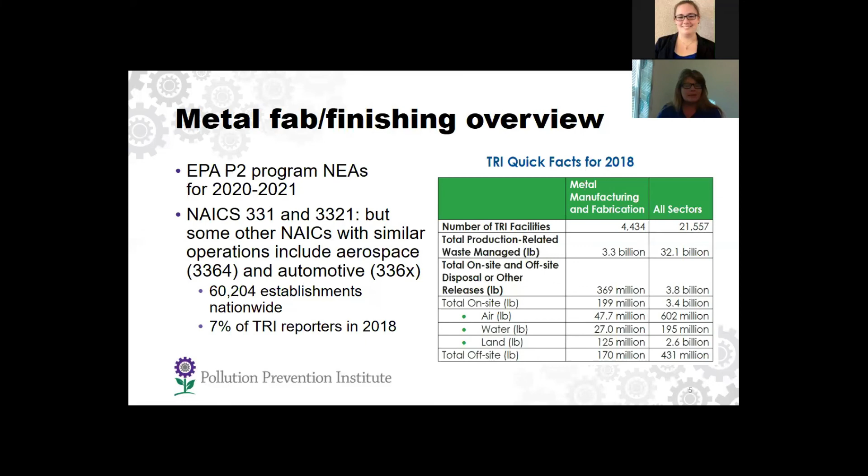There are approximately 4,434 industries that are reporting to TRI that are in the metal manufacturing and fabricating industry. And so you can see here they're managing 3.3 billion pounds of waste annually. And down here you can see the breakdown of on-site and off-site disposal or other releases into the environment. And today we're going to be concentrating on those. We're going to be talking about releases into the air, into the water, hazardous waste and other waste releases. And so that is what this workshop is going to be focusing on. Next slide, please.

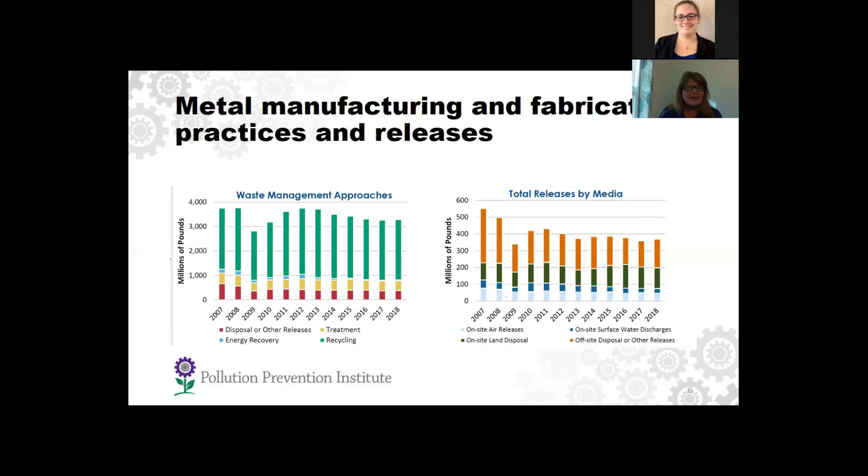Over here are total releases, and we can see that off-site disposal is a fairly large portion, and some of that really is in the recycling area. So again, it matches up with this information. And we have on-site air releases that are down here. These numbers, they're not that large, which is a good thing. On-site land disposal and on-site surface water discharges. Arthur and Lena are going to talk about the water end of things today, and we'll delve into that. It's really important. Next slide, please.

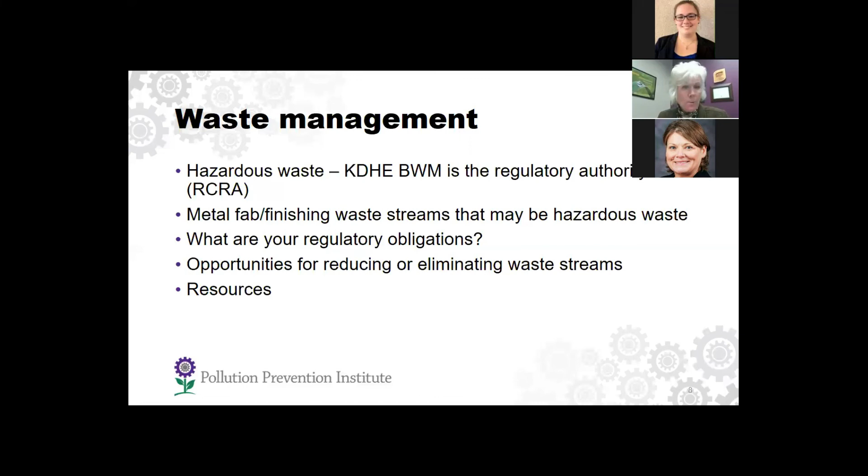And in fact, RCRA and hazardous waste is probably the strictest enforced regulation across the country. So that means if you're going to see an inspector, you're more than likely to see an inspector from KDHE Bureau of Waste Management. So we're also going to touch on what are your most problematic waste streams with regard to hazardous waste. What are your regulatory obligations? And then what are the opportunities for reducing or eliminating some waste streams? And then some resources. Next slide, please.

Okay, so we're going to start with these potential waste streams. As you can see, I have broken these up into 3 different processes: your metal preparation process, which of course is so important, your painting and coating process, and then your cleanup process, which is probably the area where you generate the most hazardous waste. You can read the slide there, blasting solvents. Sometimes some of these chemical waters, those are the wastes that you might generate in metal prep.

In painting and coating, it might be some gun cleaners, it might be spent paint solvent waste, or expired inventory, which is really a problem, right? Because you paid for that kit coming in, it sat on the shelf, you did not use it, and then you paid for it going out the door. So that's a low-hanging fruit that really needs to be addressed if you think that's a problem at your facility.

And then cleanup, all kinds of different solvents that you use, paints mixed with those solvents from the cleanup process. Although the water that you may use in your 3 or 5 stage washer, if you have one, is regulated by the Clean Water Act, sometimes you've got sludges that you've got to dig out of those washers, and those have to be analyzed for hazardous waste. Paint contaminated materials, right? Are your filters, your rags, your masking, your PPE hazardous waste? Well, the answer is sometimes, if you're using RCRA metals like chromium in your paints.

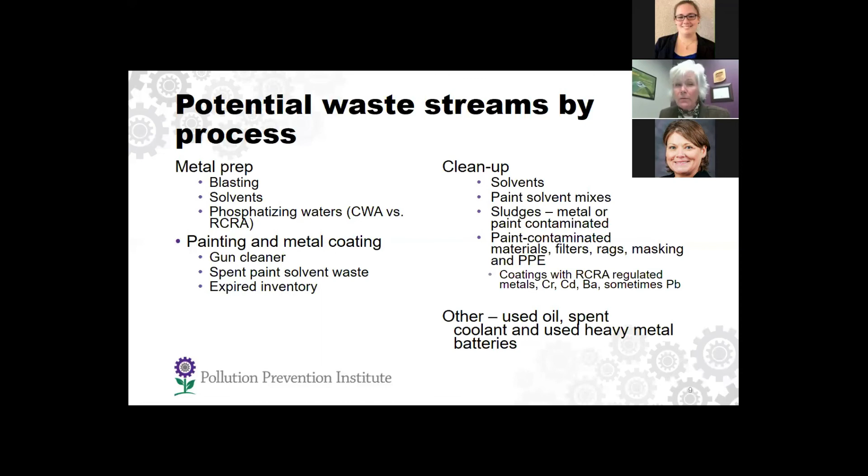When it comes to solvent waste, there's lots of ways to control that by, and we're going to talk about that, changing the material, technology, and process. Next slide, please.

Okay, your compliance obligations. So first of all, training is the place to start, you guys. So you all are hazardous waste generators. And so anyone handling hazardous waste has to be trained within 6 months of taking the position, and then has to have an annual refresher. So those are all the folks who are dumping waste into the drum. Those are the environmental managers like yourself who should know pretty much the full scope of the regulations and what is required. And those are people certainly signing the manifest.

Training is very, very important, and you have to document it in Kansas. They will ask you about your training records. We do have an online training curriculum. It costs $30. You can take it anytime, and it does give you a certificate of training. That needs to be complemented with some on-site training.

The next thing is determinations, hazardous waste determinations. Those can be really confusing for hazardous waste generators, and we will be happy to help you with that. But what you have to do is fill out one of these documents for each hazardous waste stream you have. And there are some waste streams at your facilities that you may think are hazardous, but are not. Or by doing some waste segregation and determining, you could actually take them out of the hazardous waste stream. And we are good at helping you with that, and we would be happy to help you do that if needed.

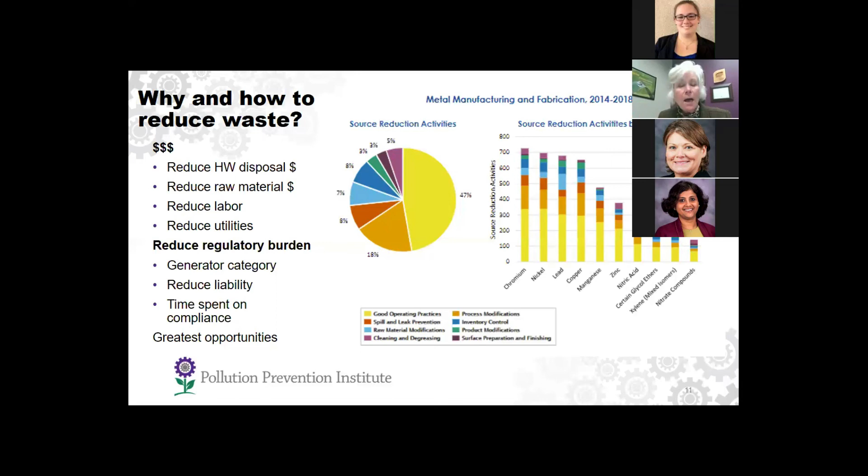And so if you look at the chart on the right-hand side, the source reduction activities by chemical, you can see that chromium, that heavy metal, and some other metals there that you use in your industry, those are where some of the big opportunities are from a chemical aspect. So if I've said something that raises a red flag, be sure you're taking notes and checking on that, and then email us if you have a question. So next slide, please.

Well, if you're using a solvent like trichloroethylene, or TCE, or maybe you're using 100% xylene or toluol, something like that, do you need to use 100%? Can you have a less toxic solvent? Do you need to clean all of those parts with that solvent, or can some parts be cleaned with something that's non-hazardous? Painting and coating, again, look at those RCRA metals. Can you change to a powder process instead of a wet process?

And then cleanup. Then when it comes to changing the process in painting and coating, when you're painting, I'm certain you are painting all the same color at once and minimizing your color changes, because that can generate a lot of extra waste if you are not systematic about that.

And when it comes to technology, it can be as simple as making sure you've trained your people and you're using an HVLP gun. And realize that some of these same things are going to transfer over, and you're going to hear Linnell mention some of these same things for air quality, because they not only have an air implication, they also have a waste implication. Next slide, please.

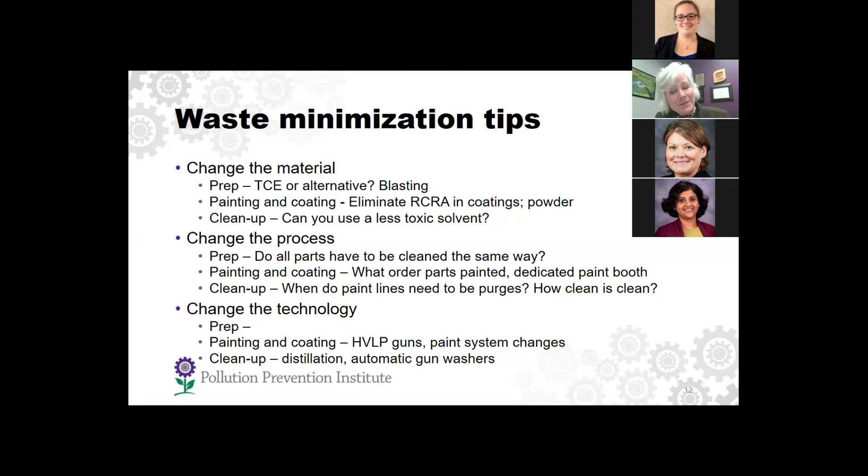And then there's all kinds of technical guidance documents. And if you've worked with me in the past, I provided you with several. They specialize in how do you do a determination? What is hazardous waste? How do I handle my solvent contaminated wipers? All those types of things. So if you have questions about that, let us know and we'll get you a technical guidance document.

And then on our website for hazardous waste, in addition to our training, we have a great video that Arthur worked on, container management. Excellent video to use as training at your facility. We also are the group that works with KDHE, and again, all of our materials are KDHE approved. We've got this generator compliance calendar that many of you have, and it's on our website. We also have a hazardous waste determination app, which is undergoing some updates right now.

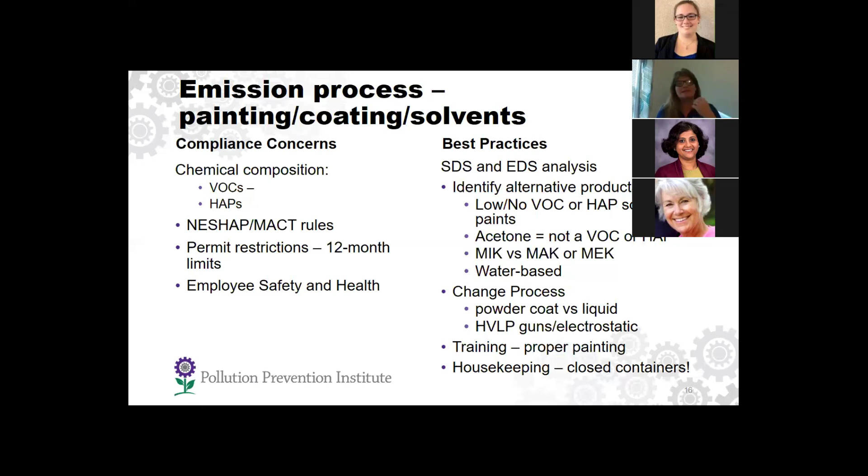Plating, etching, anodizing. Again, in this process, a lot of times we're looking at the heavy metals that are in your plating, etching, or anodizing processes. So there are NESHAP and MACT rules that apply. Sometimes there's 12-month rolling limits that you'll get in an operating permit because of that, like if you're doing chrome plating.

Best practices is increase the drag out time. Make sure that the design of your tank flows is preventing any drips between tanks. Close tanks, especially heated ones, when they're not in use, and prevent parts from getting into the tanks, because that's what makes the tanks dirty faster, and you have to change out. And then that could increase what you're having to send down the drain. Also, change chemicals if you can.

I do have some resource videos. This one is on our national SBEAP YouTube channel. It is on 6W, which is for area sources that are doing plating and anodizing with chromium or chromates. This is a trade association presentation for EPA that is really great about P2 and plating. And I can provide these links to everyone later after the presentation.

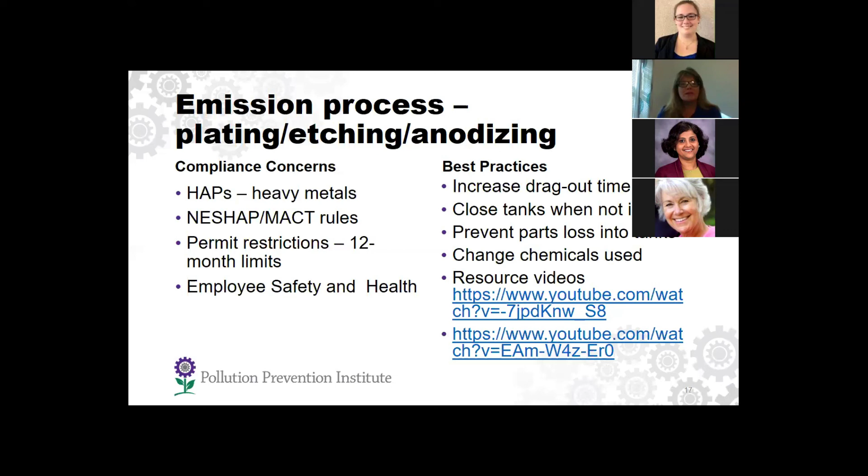Degreasing is another area. Nancy kind of talked about TCE, but in the past we've had PERC and other really hazardous chemicals, hazardous air pollutant chemicals used. So here again, you could be looking at VOCs and HAPs. What you want to go to is the low or no VOC HAP solvents if you can. Do cold degreasing versus heated or vapor if possible, because that's going to reduce your emissions. Total enclosure is another great way to contain those emissions and prevent them from being released.

Water-based degreasing. I know that scares a lot of people working with metal, increasing rusting or whatever, but it is possible. Water-based degreasing or water-based cleaning is possible. They're doing it in California. I know California scares people because they are much more stringent than even EPA, but they're doing it out there and they're doing it successfully. Then there are some soy-based degreasers on the market, and so this would be a less hazardous option.

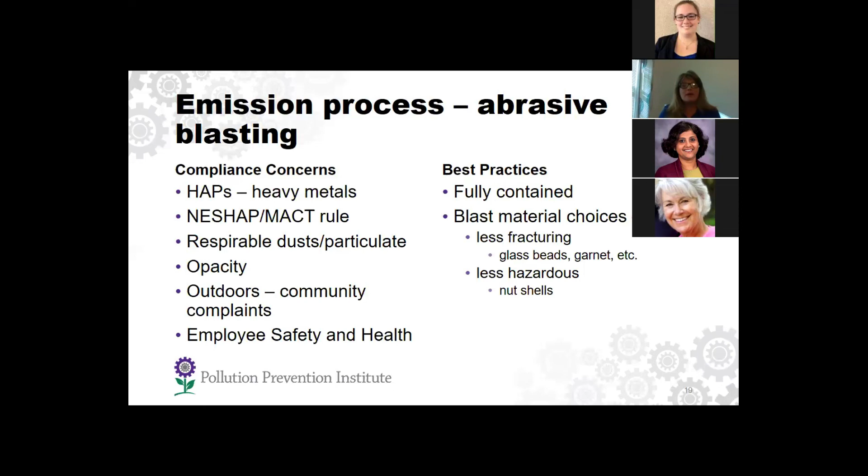Combustion. It's kind of one of the forgotten ones. A lot of people know about it, but in your industry type, if you're painting, you may have a burn-off oven, you may have dryer ovens, you may have heat treating of your materials, you might have a wash booth, you might have a boiler, you might have an emergency engine. So these are going to be creating criteria pollutants like NOx, SO2 or SOx, CO, VOC, PM.

And there are new source performance standards that are applicable and NESHAP requirements for these types of equipment. And the biggest compliance concern I have routinely seen is the improper use of certain pieces of equipment here, where people are using a heat treat oven or a burn-off oven to dispose of paint filters and other wastes. If you were permitted for a burn-off oven, it's for maybe your paint hooks only, and you should not be putting parts in there to refurbish. So it's kind of a problem.

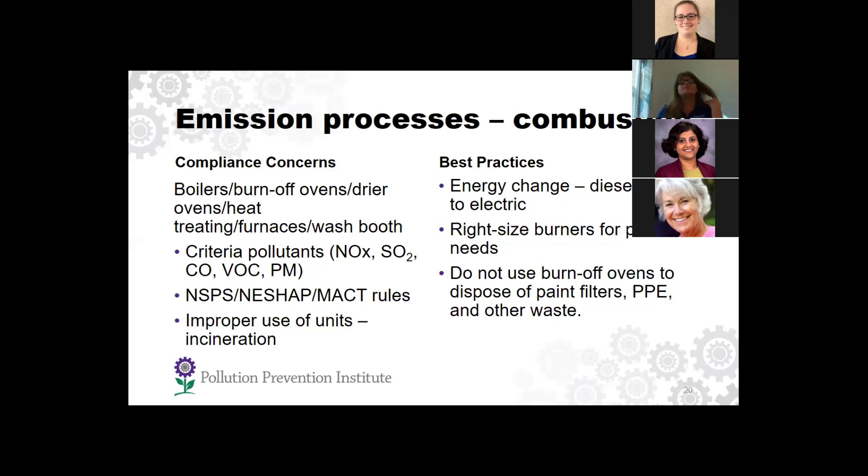Best practices here is changing that energy source, going from a liquid fuel like diesel to natural gas, or if you can go to electric, that is your best option. Resizing your burners for your process needs. There's a lot of times you see oversized boilers in use, oversized water heaters for wash booths. So you can make those assessments and changes. And then again, I've already mentioned the last one. Next slide, please.

Welding, plasma, and laser cutting. I left this for last because, as you'll see over here in the column best practices, P2 in this area is the toughest challenge because your raw material contains manganese, nickel, sometimes chromium. Those are all in your raw material that you're bringing in. Your welding rods, your welding wire also can contain those. So those emissions, those heavy metals coming from welding, they're particulates and they're fumes that contain HAPs. So there are NESHAP MACT rules that could apply here if you're an area source.

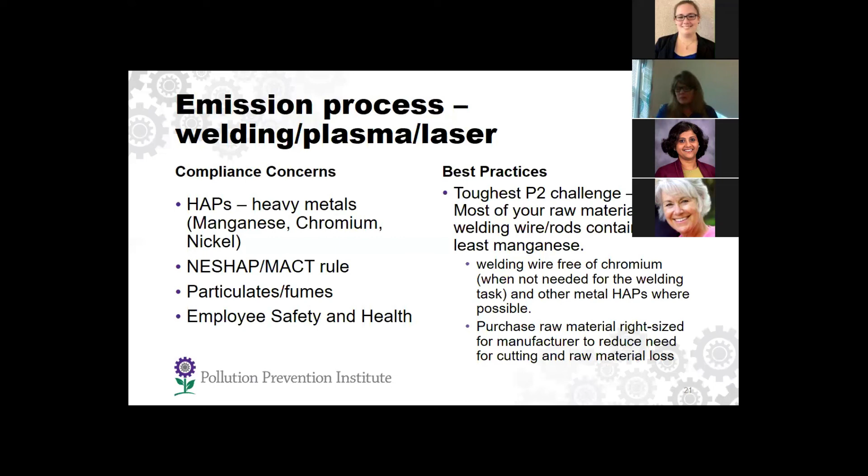And I'm glad to help anyone with this. A lot of times that recycle number is so high in your industry type because it's hard. I know it is for you to be able to purchase your raw material, your flat sheets of metal coming in, or your rods, or your structural steel beams. It's very hard for you to right size that from the manufacturer, the foundry, or whoever you're buying it from. But if you can investigate that, that's a place to start. Then it reduces that recycling load on you. Next slide, please.

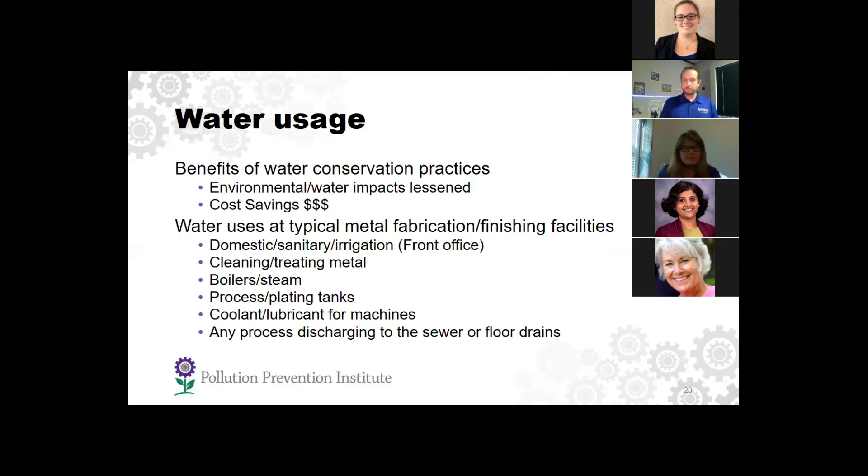Okay, so how do we determine how much water we're using? The best way to do this is to assess and analyze. And how we do that is to take a minimum of 12 months of your water bills. And we say 12 months so you can look at the seasonal fluctuations. I know just like in agriculture, manufacturing, there's peaks and valleys. There's sometimes when you're really busy and sometimes when you're not. And looking for an entire year will allow you to kind of see where some of those peaks and valleys may be.

Once you kind of get an idea of the overall flow of water in your facility, then it's time to figure out exactly which processes are taking up the most water. One way to do this is to put in and install sub-metering. You've got the main meter on the outside of your facility that's measuring all the water going in. You can install smaller meters into your plumbing system as well to figure out how much is going to your front office or how much is going to your plating tanks. That's one way, but that can also be a little bit of a pain and a little bit of an O&M issue to keep meters running. You can also just simply use a portable flow meter, or you can use a bucket and a stopwatch.

We also recommend to take a look at those uses and then figure out, are there any abnormalities? Like, why am I wasting 8,000 gallons every night or every weekend? Oh, wait, somebody's not shutting off the valve. Or, wait a second, this machine is running. We could maybe shut it off and we won't waste as much water. It's a lot easier to track that usage when you get everything kind of broken down.

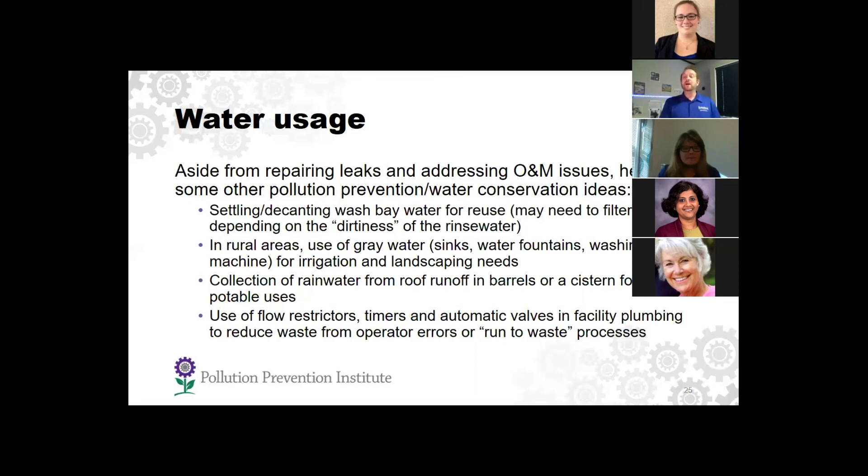So these are some of the ideas, briefly talking about the water coming in. Let's talk about the water going out now. If we could go to the next slide. All right. Wastewater. It's obviously a big issue for a lot of facilities, especially those of you that have plating tanks or use large baths or treatment processes.

Basically, the Clean Water Act is what regulates all that water that goes out of the pipe. And the Clean Water Act is a big federal law, much like the Clean Air Act that Linnell just talked about, with all of its parts and pieces. The Clean Water Act's major piece that does its regulatory lifting is called the National Pollution Discharge Elimination System, or NPDES.

Just to touch on this briefly, the way that wastewater is regulated: at the federal level, of course, you have the EPA, which in Kansas, our local regional office is in Lenexa, Kansas. It's Region 7. Then underneath the EPA, you have KDHE. And then underneath that, there's a lot of times a local entity, and I'll talk about that a little bit more in just a second. A local entity could be a municipality, a county, or a consortium of counties or municipalities. But there's 3 levels, and all 3 levels can act independently of each other in enforcing the same rules.

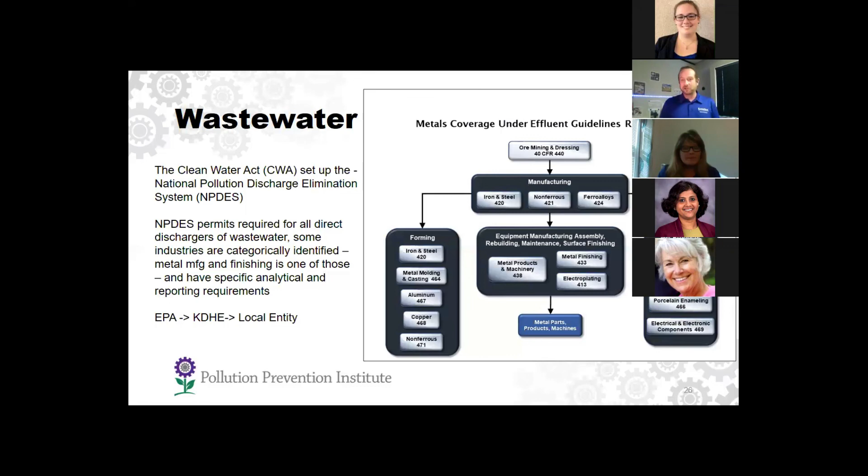Now, it's not that you will get double stung by any of these things, but any one of these entities can show up and do an inspection at any time. So just to let you know, EPA doesn't necessarily have to coordinate with KDHE or the locals in order to show up at a facility to look at a permit. So if we could go to the next slide, and if we could also bring up the first poll.

Basically what this first poll will be is, do you know if your facility has a pre-treatment permit with the city for your wastewater? So if you guys could check one of those 3 boxes and let me know. And I'll explain why I'm asking that particular question. If your facility is located in one of the 18 municipalities... okay, it looks like we've got a few that aren't sure, and some that are no.

Basically, if your facility is in one of 18 municipalities with a KDHE approved pre-treatment program, then your facility must work with that municipality to make sure that any NPDES and local requirements are met. Basically, what KDHE has said is, let's take the city of Wichita, for example. Wichita, you've got a big enough wastewater treatment program that you can run this pre-treatment program for us. It's going to have the same requirements plus any additional ones that Wichita may have, but they will be the ones to administer this permit for you.

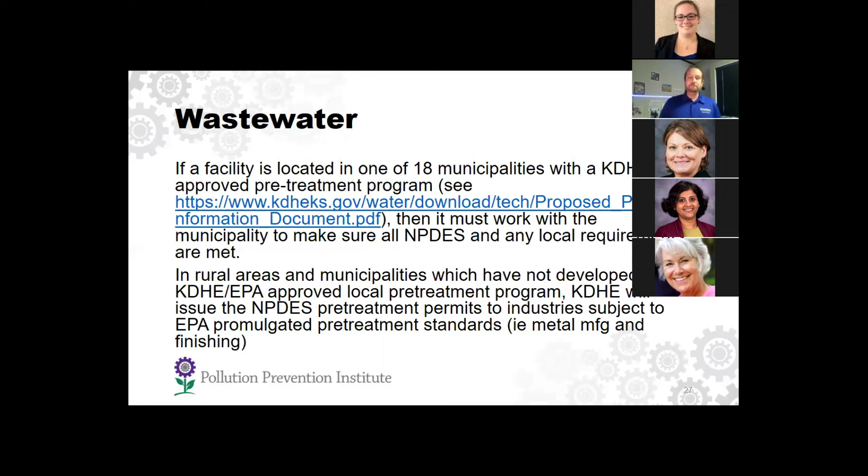All right, so what do these permits, pre-treatment permits and NPDES permits mean? Well, they go through and basically say what they expect to see possibly in your wastewater, what you need to sample for, when you need to sample for it, and when you need to report those sample findings to either the EPA or to KDHE or to the local municipality that has the pre-treatment program.

And for those of you who are doing just basic cutting and welding of bare steel, you're probably going to have to look at total suspended solids and oil and grease in your wastewater. For those of you that do phosphatizing, parkerizing, passivation, bluing, those types of things, you're probably going to have to look at pH, phosphorus, nitrates, and a list of metals in your wastewater. And for those of you that specifically do plating and anodizing, you're going to have to look for pH, metals, and cyanides in your wastewater.

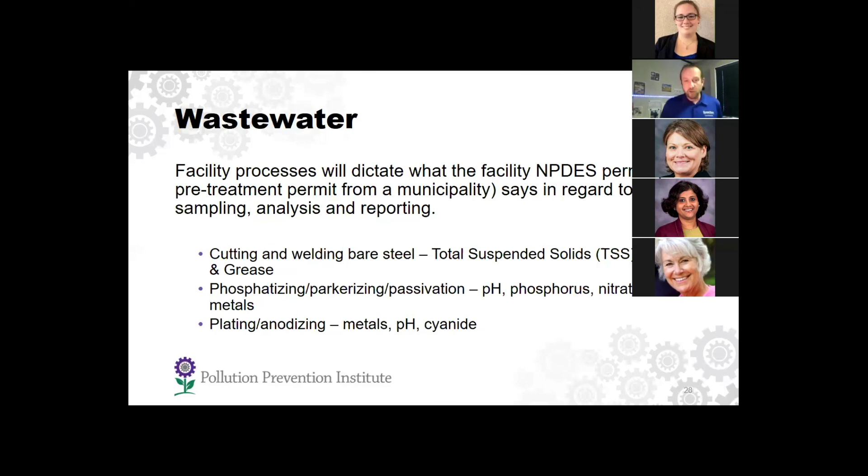If we could go to the next slide.

Those are the analytes that I just went over, that would be in an NPDES or a pretreatment permit. But I'd like to say a few things about those permits, both the NPDES permits and the pretreatment permits. They are a legal binding contract. It's not something that you just get and you put in your drawer. Please don't do that. Read the entire permit, understand what it says, and abide by the terms and conditions. Make sure that you're fulfilling all the reporting requirements on time. If there's a quick way to get an inspector or a nasty letter from the regulator, it's not fulfilling your requirements or obligations. And the biggest thing that I can let people know is never, never lie on your reporting.

There's been a number of instances here in the state of Kansas where municipal wastewater treatment operators have had shortages of staff or have had incidents happen where they weren't able to collect their daily samples that they needed to. Well, they've gone back and just kind of carried over the numbers from the previous day. It may seem like, in mountains of data, that's not a big thing to do, but it's basically lying. And the EPA, KDHE, local pretreatment programs have zero tolerance for that.

So it's almost always better to fall on the sword and say, listen, we didn't get this sample taken, or we don't know what's going on here, than to lie. Problems can be worked out. When you lie, that's committing a crime, and we really can't help you a whole lot in that instance. But if something's wrong, if you need assistance, you can always contact us. You can contact the Surface Technology and Environmental Resource Center. I've got their link here on this page. They've got some wonderful calculators for figuring out rinse tanks, volumes. Then, of course, the EPA has some websites as well.

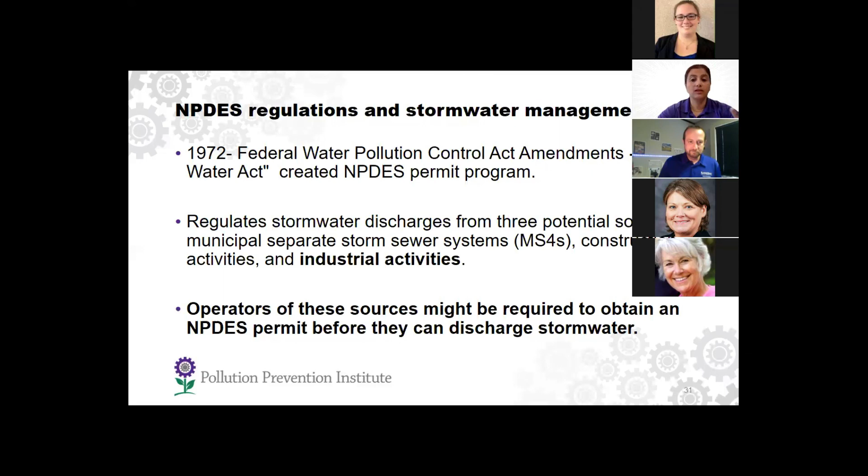So today we'll be focusing on the industrial activities, and we know that operators of these activities might be required to obtain an NPDES permit before they discharge stormwater. Next slide, please.

So now you know the NPDES permit and stormwater, so you must be wondering whether your facility requires an industrial stormwater permit. EPA developed these permitting regulations under NPDES to control stormwater discharges associated with 11 categories of industrial activity. Obviously, metal facilities fall under that, and it is described under the Standard Industrial Classification, or SIC Code, Major Group 33. Like my colleagues already talked about, primary metal facilities deal with steel works, rolling and finishing mills, blast furnaces, iron and steel foundries, and smelting.

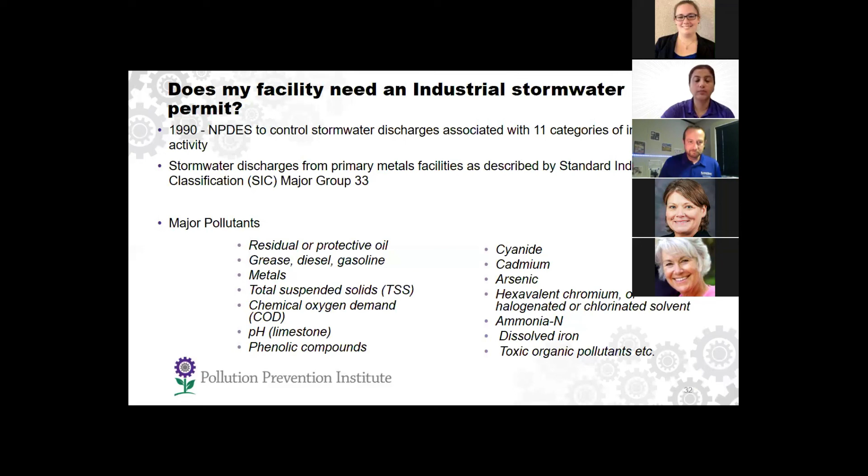So these create these major pollutants, which I have listed here. It might be oil, grease, diesel, total suspended solids, COD, ammonia, cyanide, cadmium, etc. So these are your major pollutants from the industrial source. Next slide, please.

And also your activities like vehicle and equipment fueling and maintenance, where leaks occur, and waste management and handling, like Nancy talked about, where you might have some losses and materials that fly off. Then there are rolling, casting and finishing operations, where there is exposure to wastewater. Even though you have a permit, you do not want the wastewater to come in contact with your stormwater.

You also have other activities happening in the yard which might create soil erosion. And you do have illicit discharges that happen if there is improper connection of floor drains, sinks, and other things. So I would like to launch the poll question.

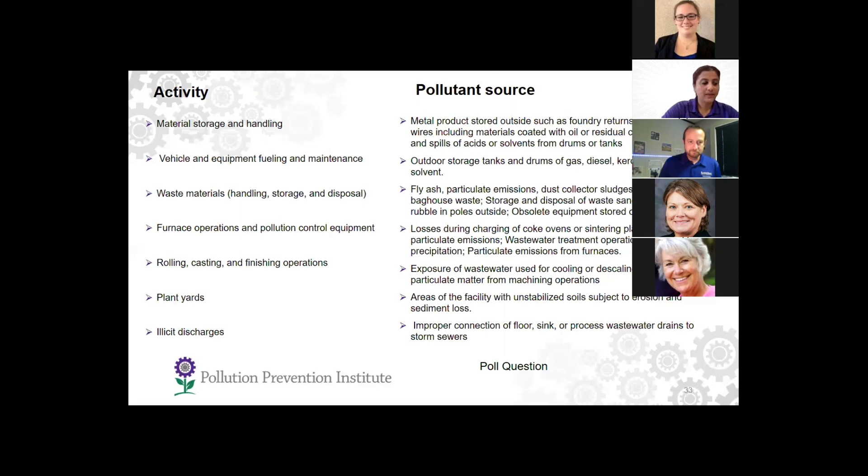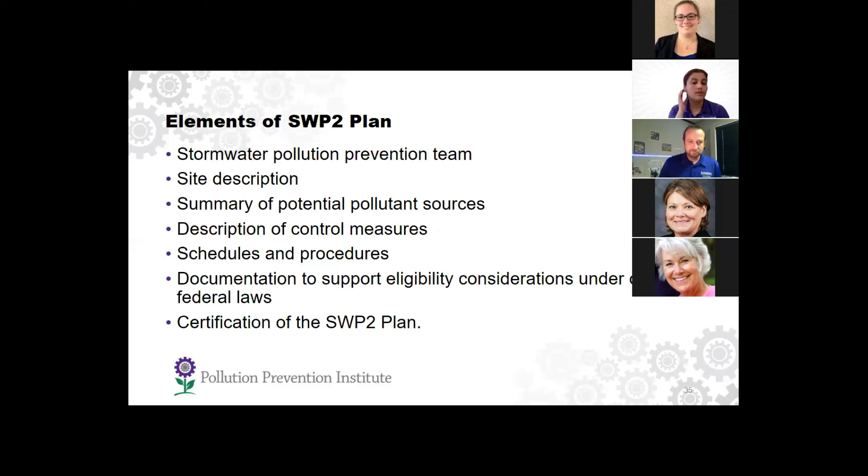Then you have the description of control measures. Here you have to note what structural or non-structural practices you do at your industry to control stormwater pollution. And then you have your schedules and procedures, mainly your routine facility information and your reporting procedures. And then you will have to have the documentation to support any special eligibility consideration based on your effluent limit guidelines. And then finally, certify the SWP2 plan. That's it. So next slide, please.

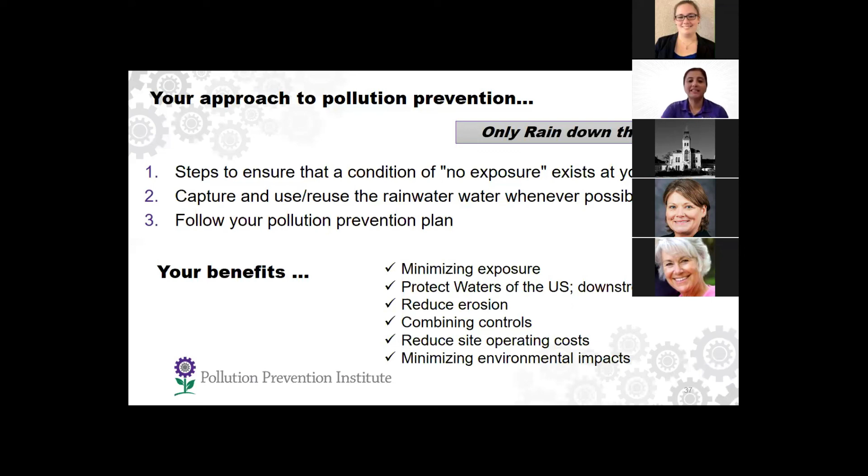And above all, if you collect rainwater and use it for landscaping, you reduce your site operating cost, thus minimizing your environmental impacts and creating a better image. So I guess that's towards the end of my presentation, but I have some resources for you.

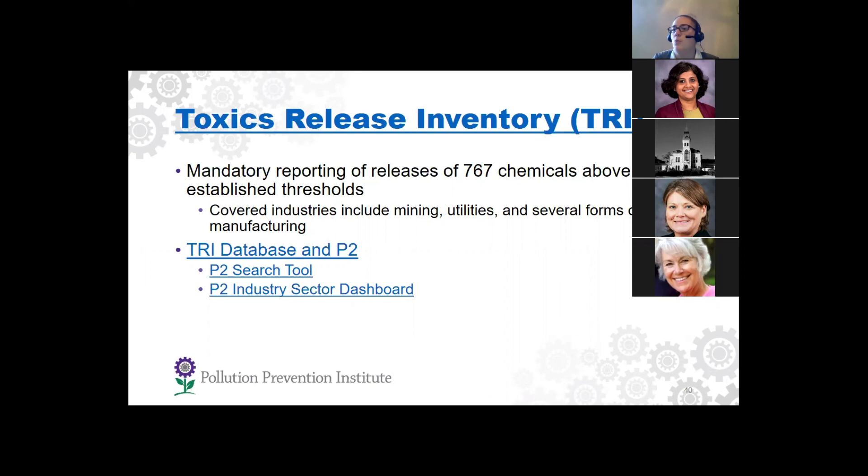It's a mandatory reporting program affecting a list of chemicals identified as having adverse human health or environmental effects for certain specified industries that are releasing some of those TRI chemicals above an established limit. So there's a lot of information available on the TRI database. We are mostly going to look at their P2 search tool.

Now I will give one caveat here: they use a looser definition of P2 than you normally see, because it's basically if they see a reduction, so a lot of things that wouldn't normally be counted get included. There's a recycling project on here, but there's also things like if someone had a higher than usual total release the previous year and then returned to normal, their system recognizes that as source reduction, even though it's not exactly. So that's just something to be aware of when you're looking through these, and just check on them a little bit.

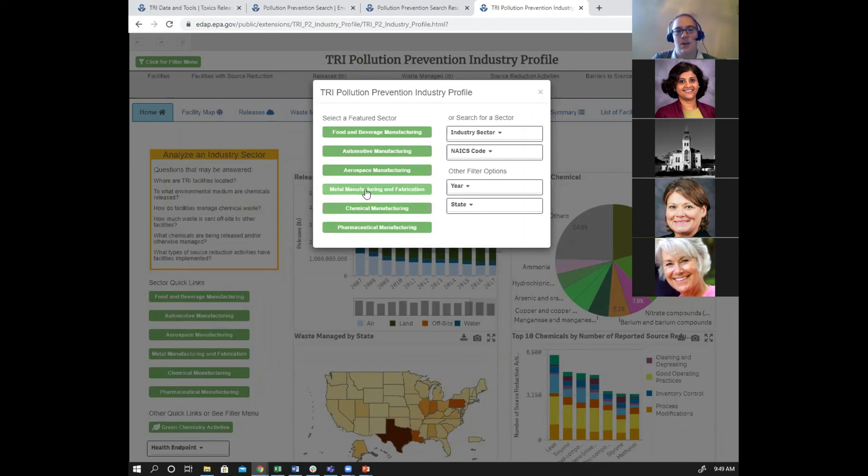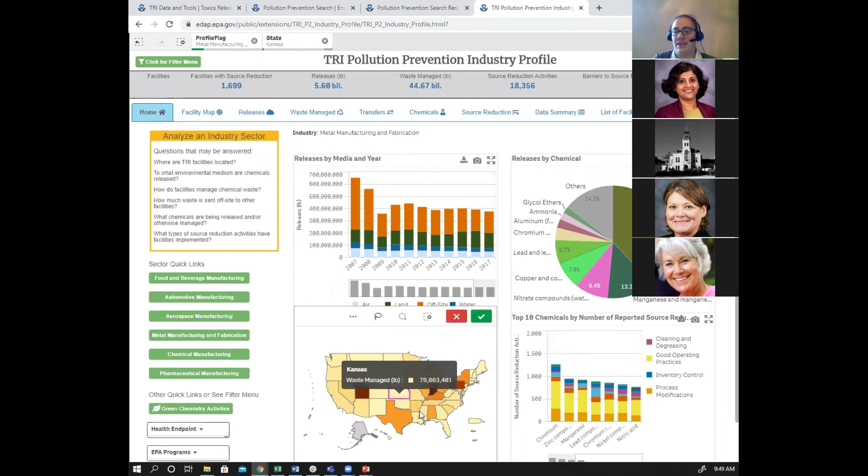And then another thing they have available for a quick overview of different industries is the P2 industry sector dashboard. So just for example, if we looked at metal manufacturing and fabrication, then we can get some general TRI P2 data on that industry. You can look at releases by media, releases by chemical, chemicals by reported source reduction activities, and you can also narrow it by state. So we can look at some more Kansas specific data even.

And then a little bit more specific resources. So if you are looking for replacement products, if you have something potentially harmful and you're looking for something safer, EPA has a couple resources. There's the Safer Choice Products list and the Safer Chemical Ingredients list. So both of these you can kind of search by what usage you're looking for.

And what both of these are is basically EPA has their criteria for what makes it a safer choice product or a safer chemical ingredient. These are well researched and verified to meet those criteria. If you are looking for some more general use products, Safer Choice can be a really good place to look. Sometimes if you're looking for something a little bit more specific, you might not be looking for a formulated product, you might be looking for a certain chemical, that's where you would be more likely to go to the Safer Chemical Ingredients list.